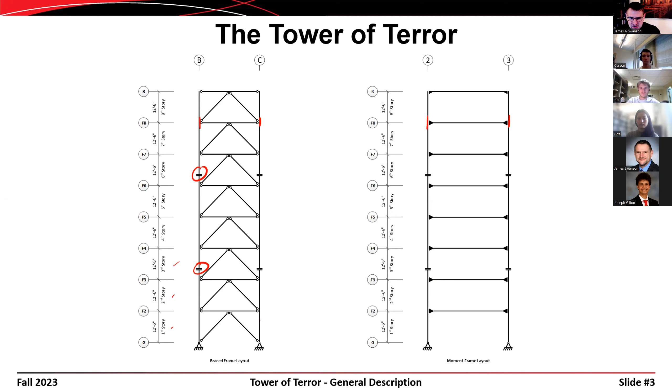All right, so I'm going to look at the lateral framing systems. I'm going to look at the brace frames first, and then I'm going to go back and look at the moment resisting frames. So when you get into a system like this, where it has a lot of members, one of the first things that you want to do is come up with a naming scheme so that when you export the results, the results make sense. If you just leave the default naming, then you'll probably spend hours chasing back the results to figure out which particular member they apply to. So that's one of the first things that I want to define here.

That's one of the things that I learned by trial and error, right? I mean, you learn to walk by falling down a bunch of times. And when I was getting good at this, which, forgive me, presumes that I am good at it, one of the mistakes I made was I didn't come up with that naming scheme right off.

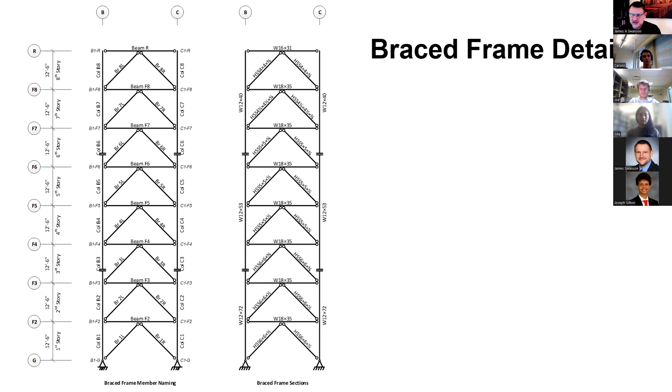And then here are the sections that I'm using. So I went through and did a preliminary design of this frame and came up with these sections, and they should be close to being adequate. I'm not guaranteeing that they're all good, but they aren't going to be absurdly overloaded or absurdly over-designed.

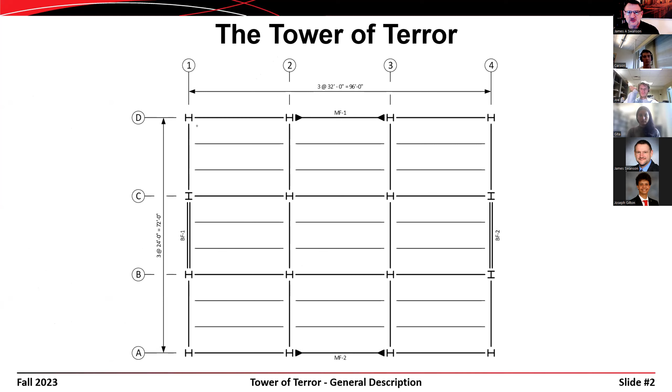Right. So here is my determination of load. And this is one of the more challenging aspects of modeling a 3-dimensional structure in 2 dimensions, right? So ultimately what we're doing is this. We're taking this structure that's 3 dimensions, and we're going to construct 2-dimensional models in order to do the lateral framing. So we're going to come up with one 2-dimensional model of this brace frame here in framing line 1.

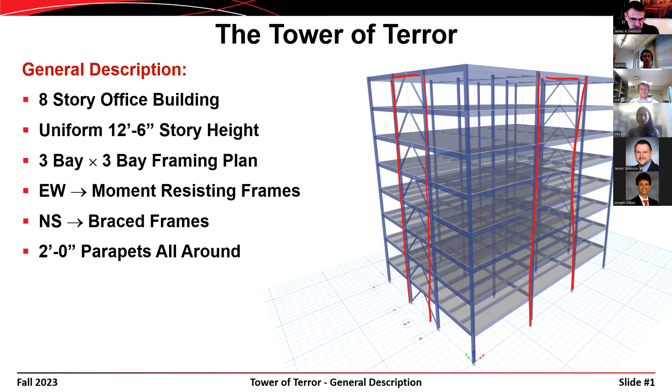And then we're going to do one 2-dimensional model of this moment frame here. And the idea is that we use that to design the lateral force resisting systems, and then the gravity system could be designed by hand. Certainly it could be designed by the computer as well. But one of the more tedious operations is figuring out what the loads are that go on the lateral framing. So I'm going to use a tributary area approach here to determine these gravity load takeoffs, if you will.

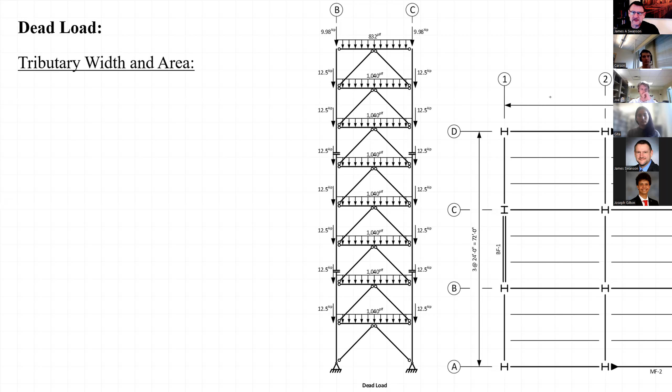And so Maggie has a different word for it that she coined, and I like it, but I can't remember what it is now. I'll have to ask her what it is, or more likely I'll remember in about 90 seconds, and then I'll interrupt class again and tell you what it is.

Anyways, so we have dead load, and for the roof and each floor level, the tributary width for the beams is going to look like that. So I have a tributary width that is 16 feet. And then I have a tributary area that will also feed into the columns that looks like that. So I have a tributary width and a tributary area, W sub T and A sub T.

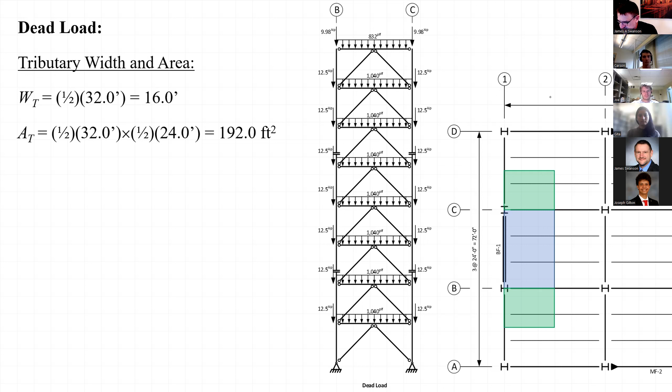And so the way that this works is that, let me see if I can coordinate colors here. The blue tributary area ends up leading to this distributed load that's on each one of those beams. And then that green tributary area ends up contributing to these point loads that are here. And I'm calling them beams, but they're really girders because they are flexural members that support other flexural members. So those are actually girders, but I'll just call them beams for the sake of simplicity.

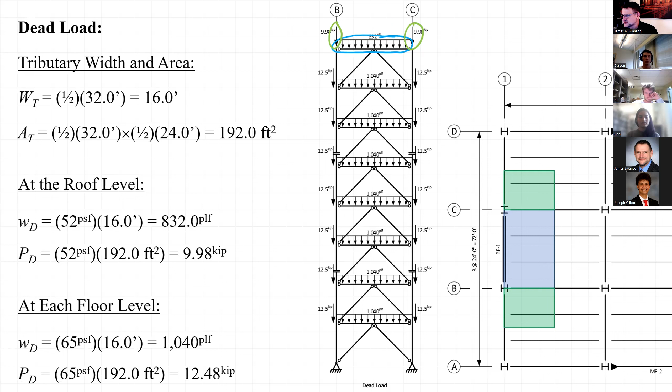Right. And so what we can do is take our distributed loads, 52 pounds per square foot at the roof level, multiplied by the tributary width. I get 832 pounds per linear foot. I can take the 52 pounds per square foot times the tributary area, I get 9.98 kips. And then at each floor level, we can do the same thing. And there you can see the distributed loads and the point loads.

And so the load path that's following here is that all the load that's in this blue area is traveling directly over to the supporting girder there. Or alternatively, and probably more correctly, these loads are coming into this beam here, and then that beam has a reaction at the girder, and you could model it as a pair of point loads instead. So that's also acceptable.

Possibly a little bit more accurate, but the level of accuracy you get out of that extra calculation really isn't justified. There's some exercises that you have done or you will do in steel design, for example, that shows that it doesn't really matter whether you model a girder subjected to a series of point loads or subjected to a uniform load. It basically ends up being the same answer.

So then over here, those loads end up going out to this edge girder, and then they go here and then into a point load that is applied to that column. And since I'm not modeling this girder here, I'm going to have to model the loads that are transferred into the column from that member instead. And that's where that 9.98 kips or 12.5 kips come from.

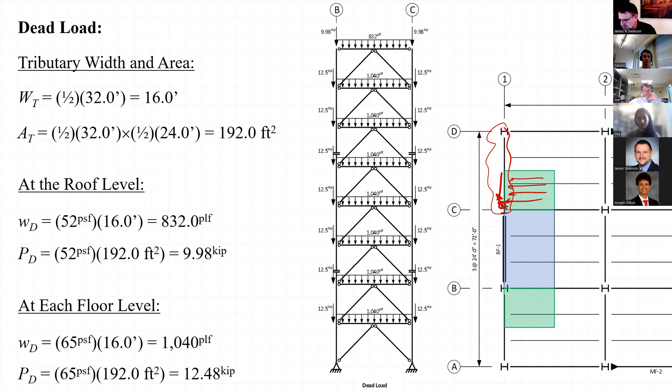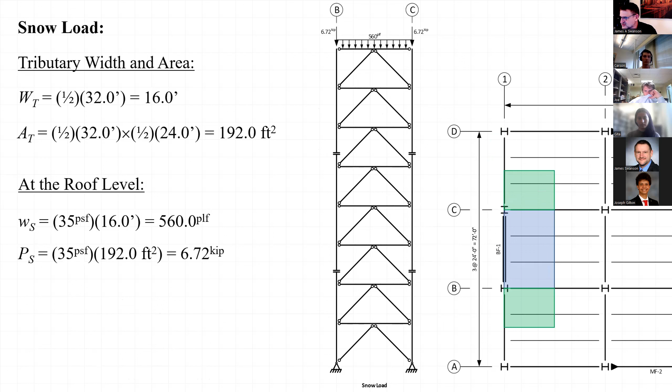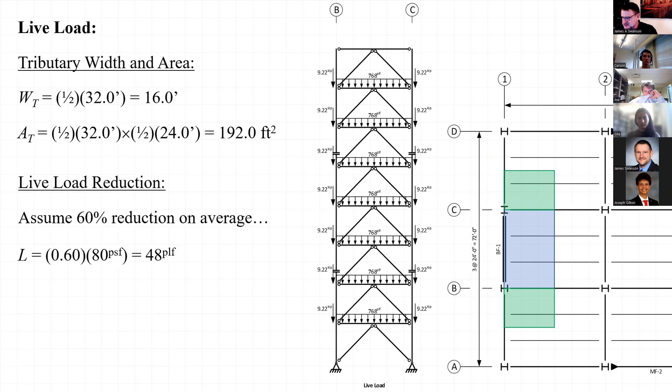All right, so with that explanation, the next step is to look at the snow load at the roof level. Similar process, except that we just have smaller loads, a distributed load of 560 pounds per linear foot and point loads of 6.72 kips. And then we can do the live load at each of the floor levels. So here's my tributary width again, my tributary area, that remains unchanged. And then if I assume a 60% reduction on average, that takes the 80 pounds per square foot to 48 pounds per, there's a units issue there.

It's funny, I've been giving this presentation for a couple of years and I still find mistakes in it.

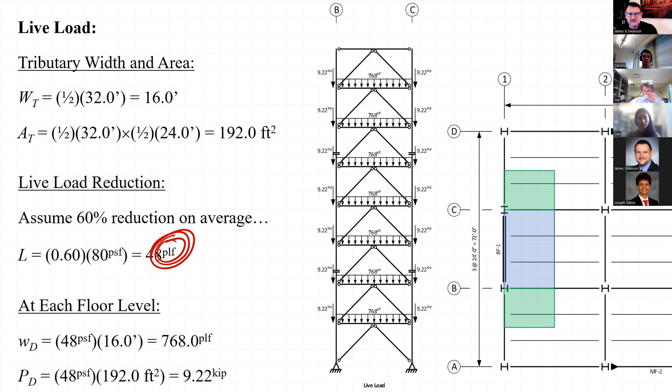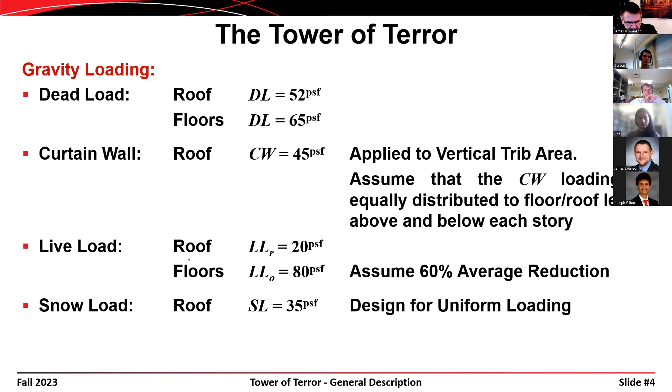And so then I take that 48 pounds per square foot, gives me 768 pounds per linear foot on each beam, and then 9.22 kips at each column level. All right. So then the next step is to look at the curtain wall loading. Let me go back to my slide where I dictate the loads. The curtain wall has a load of 45 pounds per square foot that's applied to a vertical tributary area. And so we assume that that loading is equally distributed to the floor or roof levels above and below each story.

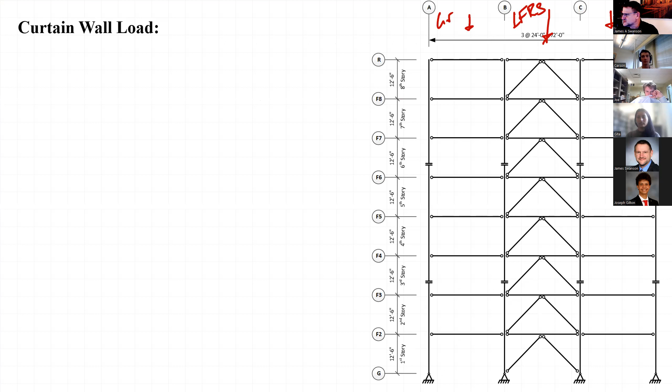So now I'm going to look at an elevation view of the frame that is in framing line number 1, including the gravity framing. So there's an opportunity to illustrate. This is the lateral force resisting system here. And this frame right here is just to carry gravity loads, and this frame right there is just to carry gravity loads. So that's what I mean when I say gravity framing versus lateral framing or lateral force resisting systems.

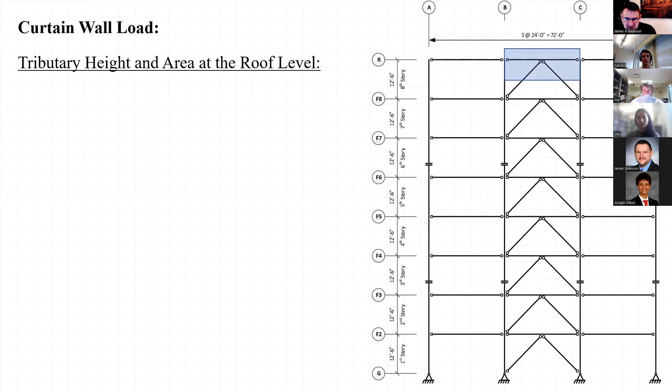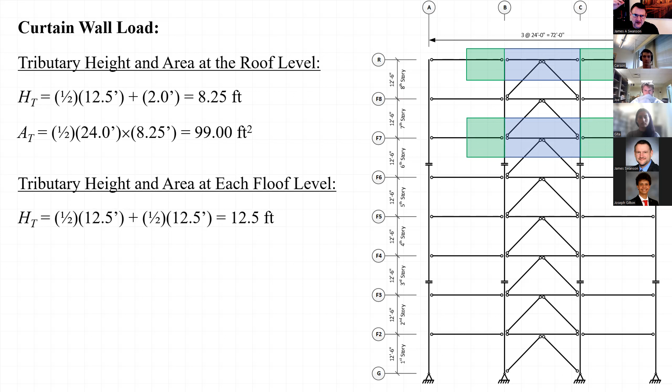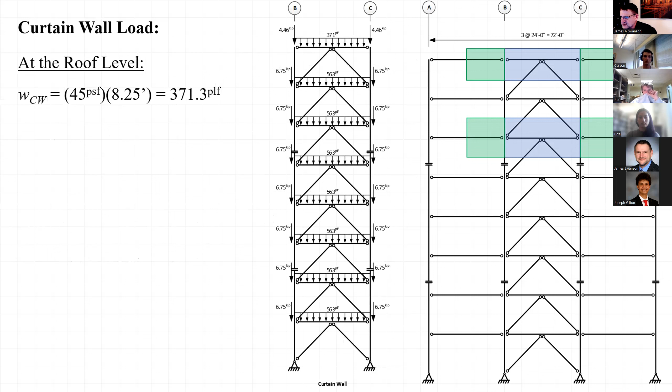And so we can do the same thing for the tributary height and the tributary area at each floor level. A little bit different because the roof has a 2-foot parapet above it instead of half of a 12-foot 6-inch story above it. And so we can calculate those heights and those tributary areas. When we calculate our loads, we end up with 371 pounds per linear foot on the beam at the roof level, 4.46 kips at the columns at the roof level. And then at each floor level, we end up with 563 and 6.75 respectively.

All right, so this is a summary of the gravity loads that I have on those braced frames, right? So I have dead load on the left, I have the curtain wall load next to that. To the right of center, I have the snow load at the roof level, and then all the way to the right, I have the live loads. So the curtain wall load is technically a dead load. So when we apply our load combinations and our load factors, I'll use the same factor on the curtain wall load that I do on the dead load.

I usually tabulate them separately though. I keep track of them separately. That way, when I find a mistake and I need to go back and chase that through my numbers, it's easier to do that when I have the curtain wall load calculated separately from the dead loads that are applied or part of the roof and the floor slabs.

Excuse me. I've done this a number of times with a number of different buildings. Every couple of years we change the capstone project, right? And so I have to do this all over again. And I never get it right the first time. It's tedious. I'm anal retentive, but even with that, I still screw it up every time.

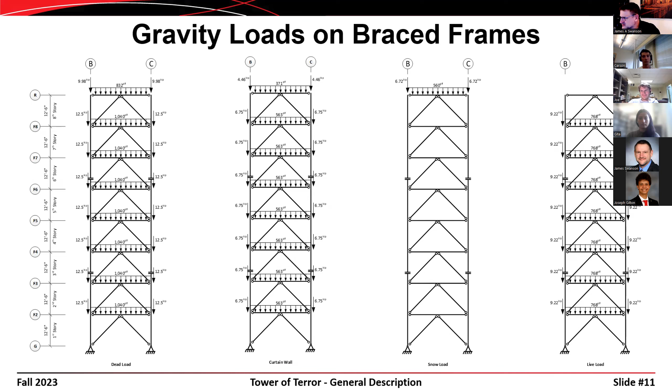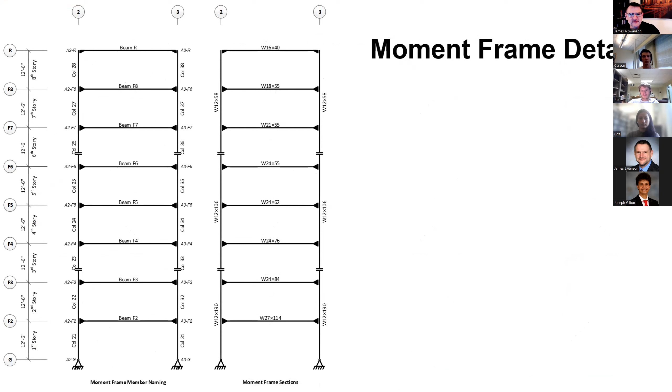Anyways, right. So there's the loads that we're going to put on. Gravity loads. We still need lateral loads, but I'll come back and hit that at the end. So here's the moment resisting frames. Same idea that we did with the brace frames, except now we have fewer members. And so if we go through and do our gravity load takeoffs, in this case, when we look at the tributary width, it's much smaller because the beams that are part of the moment resisting frame are parallel to the floor joists or to the filler beams in the structure. So the tributary width is only 4 feet on those members.

Then if we look at the tributary area that manifests as a point load in the columns, that has a goofy shape in this case. Let me go ahead and show you what that area is. It's 320 square foot per column. And the reason that is a strange shape is because any load that's acting to the left of center of that girder is going to come over and act as a point load there, plus the reaction force that comes from everything on that half of that beam. So all of this load ends up making its way either directly or indirectly into that column. And so that's why it's a goofy shape. I guess that's all I had to say about that.

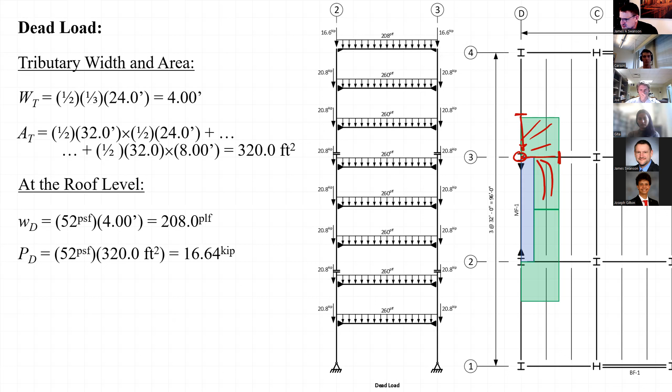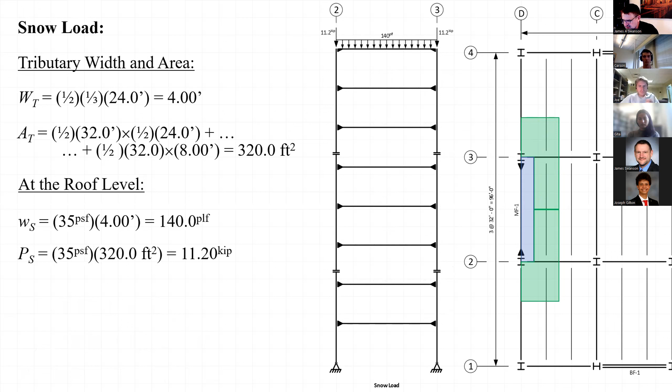So if we look at the roof level, we have a dead load of 52 pounds per square foot that ends up as 208 pounds per linear foot on the beam, or 16.6 kips at each column. And then at each floor level, it works out to be 260 and 20.8 instead. Use the same approach for the snow load at the roof level. We get 140 pounds per linear foot, or 11.2 kips. We can look at the live load at each floor level. Again, similar, 192 pounds per linear foot, or 15.4 kips at each column location.

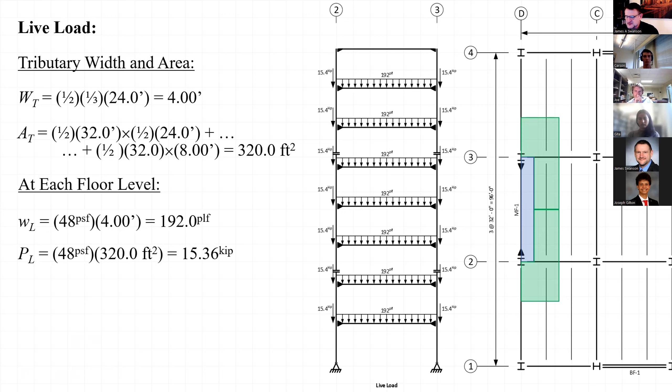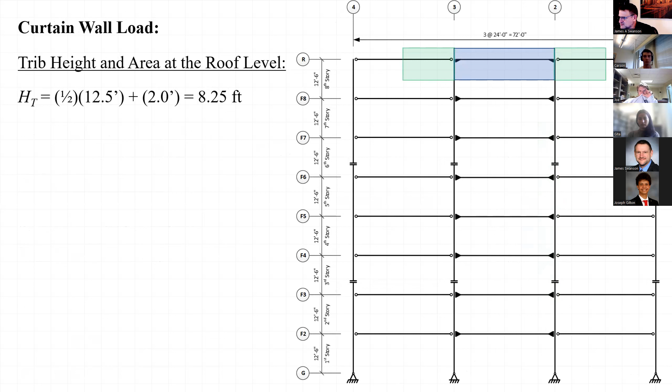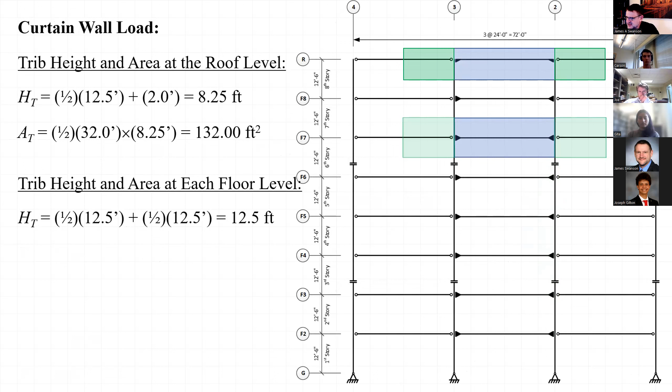And then the curtain wall loading. This is remarkably analogous to what we did with the braced frame just a moment ago. So the blue tributary area, these are vertical areas. The blue tributary area ends up being a distributed load on the beam, and the green tributary area ends up being a point load at the column locations. Different tributary heights at the floor levels relative to the roof level. And so with the curtain wall loading, we end up with these loads. All right, so there are the loads that are on our moment resisting frames, the gravity loads.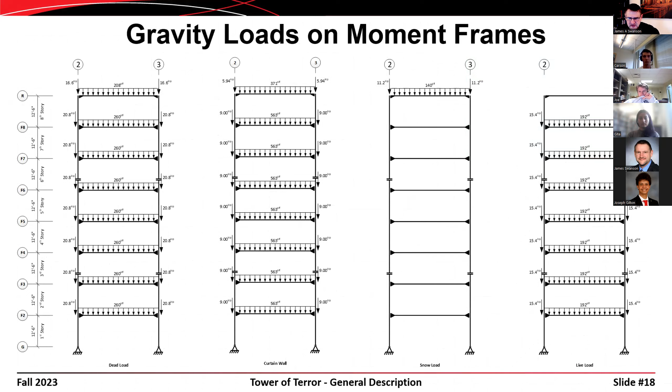Now for the wind load, if you guys aren't familiar with ASCE 7, then this is going to be foreign to you. But even if that is the case, really all we need are the loads that are coming up a few slides from now. That's all we need for this class. If you're interested in learning more about this, then take loads and systems. It's currently an undergraduate level class, but there's talk of making it a dual level class sometime in the future. I'm not sure when. That's administrative.

Anyways, we're basing our wind loads on a base wind velocity of 115 miles an hour. I've assumed exposure B. We have a directionality factor of 0.85, an elevation factor of 1.0, gust factor of 0.85. The premise is that this building is designed in the Cincinnati area. Cincinnati has an elevation above sea level of around 800 feet, depending on where you're at. So we could take an elevation factor reduction of like 4%, but it's just not worth my time to calculate that. I should also mention that these are based on the ASCE 7-16 criteria, and it is a little bit different in ASCE 7-22. Not enough to really influence anything we're doing in this class, but in case you start chasing numbers, that might make a difference for you.

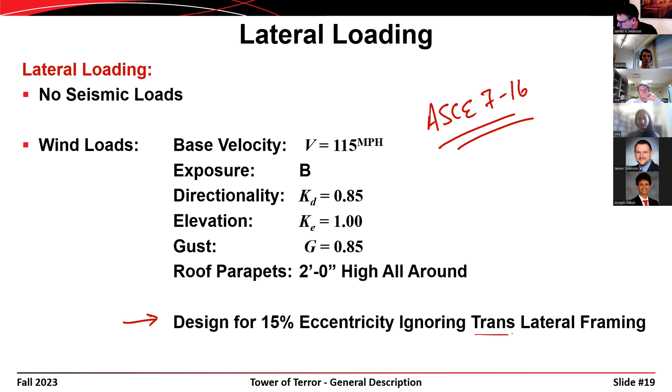One other thing: for a cookie cutter building like this one that's rectangular in plan, you don't have to consider eccentricity of the wind load acting on the structure. But I decided to do so anyways to make this problem a little bit more interesting. So I'm assuming that we have 15% eccentricity in the application of the wind load, ignoring the stiffness of the transverse lateral framing. I should wonder about including that word in my lectures nowadays. Right, so here's the spreadsheet that I use to calculate wind loads.

After you come up with the velocity pressures, the Q sub Z terms, everything else is really easy to do in a spreadsheet. That's the way I usually approach these after getting through the first couple of examples in the loads and systems class.

In the east-west direction, these are the moment resisting frames. In the north-south direction, these are the braced frames. So you have a force on the windward wall, a force on the leeward wall, and then the net, the combination of the two.

At the roof level for the entire structure, I have 23.7 kips blowing in either the east or west direction. If you add up those wind loads over the height of the structure, the total base shear in the east-west direction is 196.7 kips.

Similarly, in the north-south direction, I have a force on the windward wall, a force on the leeward wall, and a force at the roof level of 32.6 kips for the entire structure. That gives me a base shear of 277.8 kips.

Note that the parapet loads are handled a little bit oddly. Those of you who had loads and systems should be familiar with this, but those parapet loads are translated down and applied at the roof level.

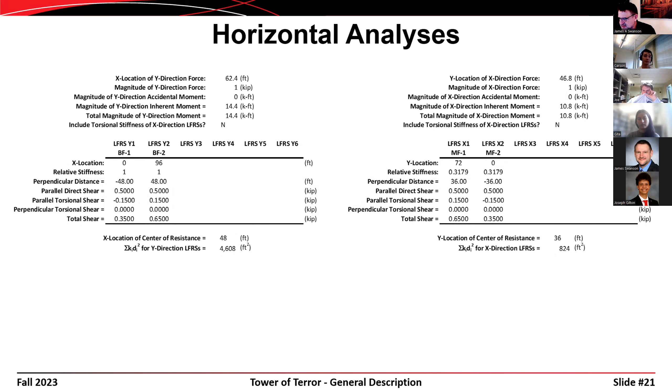The next step is to do a horizontal analysis to figure out how much each one of the lateral frames carries. The takeaway is that for the braced frames in the north-south direction, each one carries 65% of the total applied load in that direction. For the moment resisting frames in the east-west direction, each one carries 65% of the total applied lateral load in the east-west direction.

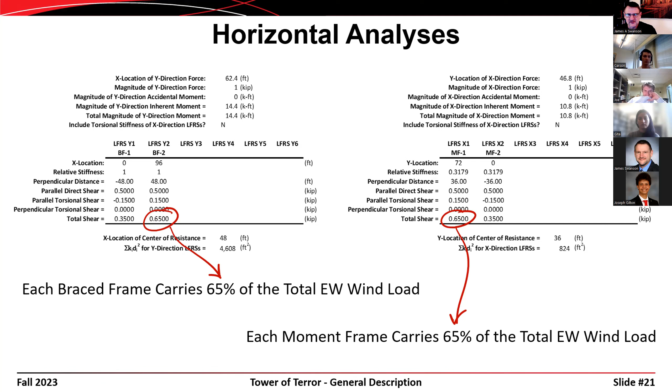Again, this is just one slide covering something I spend a week on in structural loads and systems—how to do the horizontal analysis. Not something I can spend a lot of time on here, but in short, this takes the center of rigidity of the structure, which is somewhere between the two moment resisting frames and between the two brace frames.

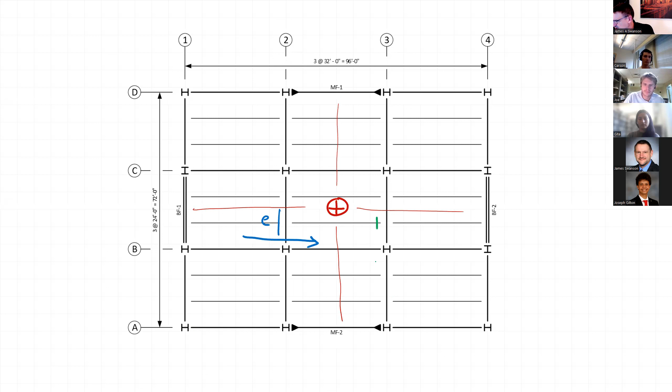This accounts for the prescription that our east-west wind load is applied with some eccentricity, or that our north-south wind load—I'll draw that in green instead—is applied also with some eccentricity. The idea is that when we take loads applied eccentrically and apply them concentrically to the center of rigidity, they come along with some force and some torsional moment.

In this case, that force is translated out to this frame and to this frame, and that moment is translated outward like this—applied in this direction on that frame, and in that direction on that frame. So you end up with one of the two frames carrying more than its fair share of load because of the eccentricity, because of the in-plane torsional moment that exists.

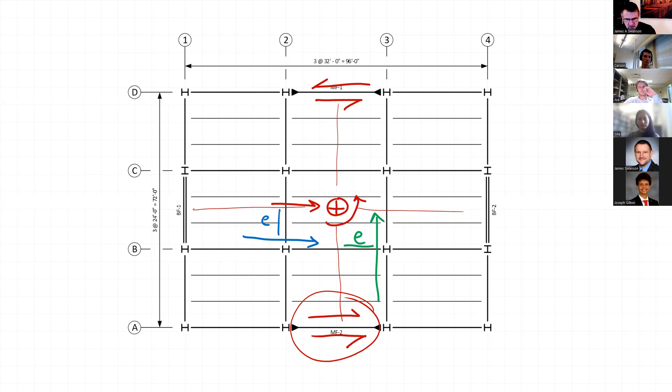So the takeaway is that if we go back a couple of slides, what I'm going to end up doing is multiplying these values. Let me go to a different color. I'm going to multiply this guy here by 65%—so I have 23.7 kips at the roof level multiplied by 0.65.

Let me get my calculator real quick. That gives me 15.4 kips. Now I'll take this guy here, 32.6 kips, which is also 65% for the brace frames. 32.6 times 0.65 gives me 21.2 kips.

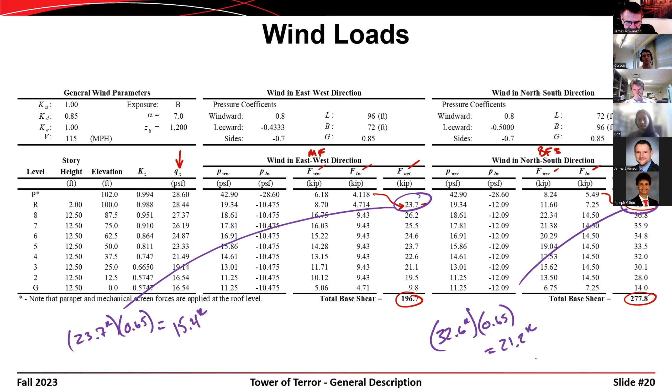So when we go ahead a couple of slides and look at the loads, I have 21.2 kips for my lateral load at the roof level on the brace frames, and then 15.4 kips here.

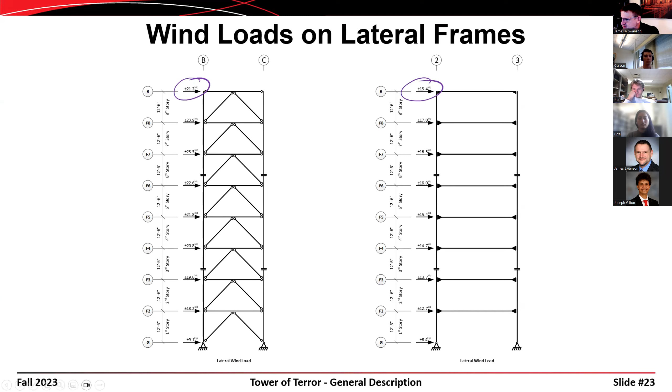All right, so now I'm going to jump over to the other computer and start working in SAP 2000. I have models of this in Visual Analysis as well, but I'm not going to do it in Visual Analysis in class—I'll stick to SAP 2000 for this, and then we'll move on and model it in ETABS as well.

Visual Analysis was nice for me because it does a pretty good job of doing design checks, and it's easier to interpret than SAP 2000 for small structures like this, which is why I used it. But I'm not going to require you guys to do that. Anyways, let's see—I've got SAP running over here.

Let's see, I need to share my screen. Screen 3. All right, so here's SAP 2000, and what I wanted to also do was bring up that same PowerPoint presentation so I could Alt-Tab between. I need to save it over here, otherwise I'll get a conflicted copy with the two computers. Now I need to wait for Dropbox to upload it. Now I need to wait for Dropbox to download it.

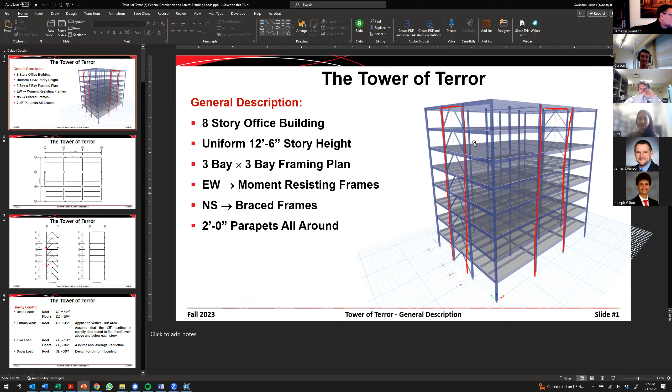Anyways, right. So here's our building. So what I'm going to do is go to this slide here and use this for the geometry. I'm going to model the brace frame first. It's a little bit more interesting. So the brace frame has a bay width of 24 feet, and then it has story heights, right? So that's what I'm going to go for. So the first step is to come up with a grid. So I'm going to define this as a grid only, and then I'm going to customize that grid.

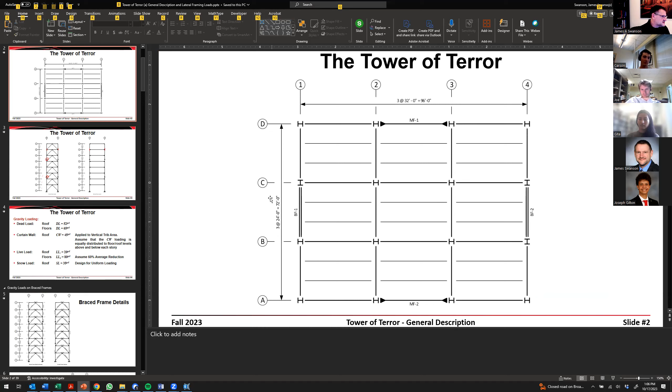So in the X direction, let me see if I'm going to model this the right way. It's actually going to be in the YZ plane. So I can do that. Let me specify these in the YZ plane. So in the Y direction, I've got 1, 2, 3, 4 grid lines. In the X direction, it doesn't matter. I just need 1. And then in the Z direction on the next slide, come on, next slide, please. I need 1, 2, 3, 4, 5, 6, 7, 8, 9 grid lines.

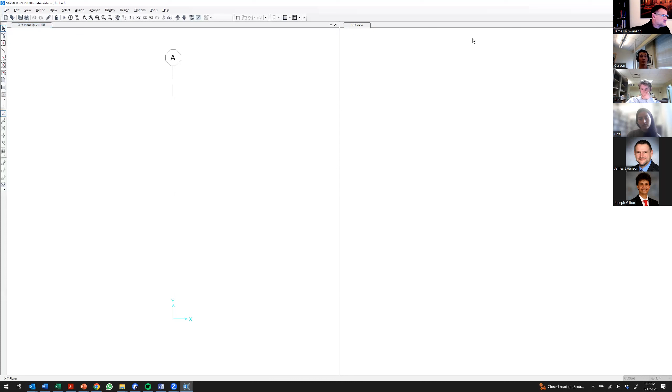So let me go here. So in the X direction, I just need 1, I need 4, and then 9. The X direction spacing doesn't matter. The Y direction spacing is 24 feet. The Z direction spacing is 12.5 feet. And my first grid line is at 0, 0, 0. Okay, and that should, I think, give me what I need. So let me keep this as a 3D view on the right. On the left, I'm going to go to the YZ plane. There we go. Is that right? Well, it didn't label the framing line right.

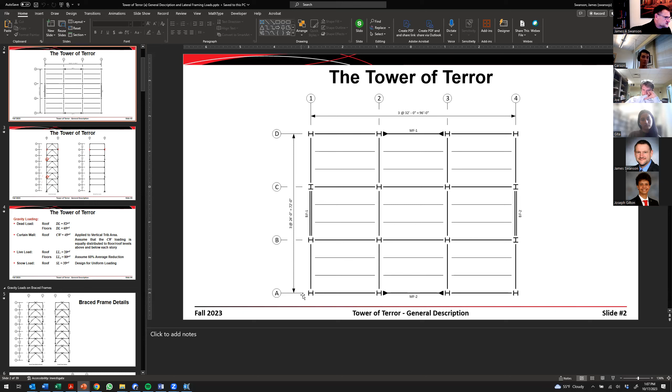So I can go in and edit the grid, modify show systems. So the grid ID in the X direction is going to be ID number 1. And then here, at 0 is going to be A, at 24 is B, C, and D. So my origin is down here at grid line A1. So this is going to be A, that's going to be B, C, and D, like that. Okay, I want this to be the ground floor. I want that to be F2, F3, F4, F5, F6, F7, and I screwed up something.

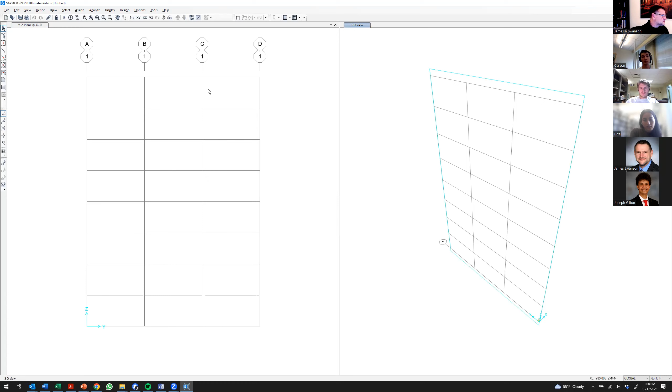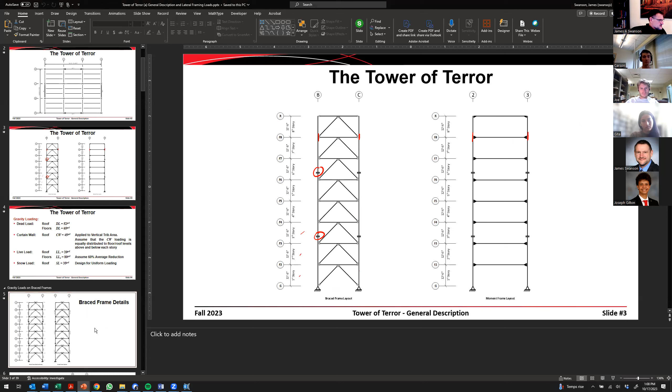F8, I did not screw up something. F8, whoops, that's 9, and then R. All right, so hit OK again, and there we go. Great. So the only thing it's missing, for some reason, it's not showing the elevations, but I'm going to run with that and call it OK. All right, so what I'm going to do is define my cross sections. And that's important because it's easier to define them up front. So I need a 12x72, a 12x53, and a 12x40 to start off with.

So let's define section properties, frame sections, import, W shape. It's going to open up this library. I'll use the 15th edition of the manual. Okay, so I need W12x72. What were the other ones? W12x72, 53, and 40. Okay, what do I need for beams? 18x35 all the way up to the roof, and then 16x31. There's the 16x31, and there's the 18x35. Hit OK, hit OK, and OK.

All right, so now what I'm going to do is draw in my columns. So the columns at the base level are a W12x72. I always start at the bottom and draw upwards with my columns. I'm only going to draw the first story columns.

I must have hit the wrong button. There we go. Now I'll draw the column here, 12x72. The framing is continuous because the columns are continuous with each other.

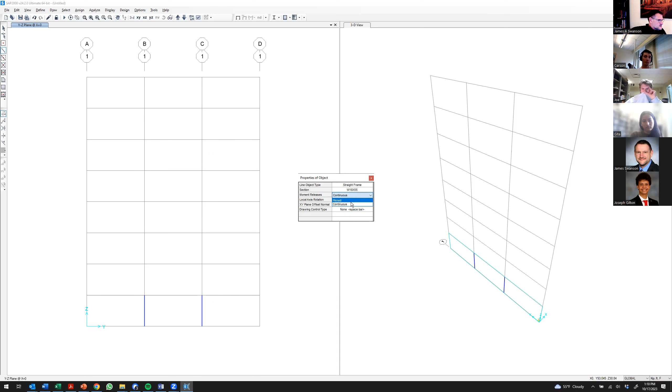Now I'm going to draw that beam in. The beam across the top is an 18 by 55. This framing is going to be pinned because the beam is pinned to each one of the columns. Then I can go in and show the releases just to make sure I have everything defined the way I want. There we go.

Now I need the braces. The braces at the ground level are HSS 6x6 half. So I'll go back in and define my sections, frame sections, import property, a tube. And I need 6x6 by half at the lower level.

These are tedious. I always wish they had done this better because they have them sorted by section size, but the way they have it, a 3/16 is bigger than a half because a 3 is bigger than a 1 in that fraction. I always thought, well gee, you guys could do better. And they just don't. So here's a 6x6 by half.

What else do I need? I need a 6x6 3/8, a 5x5 half. Let's see, 6x6 3/8, 5 by 5 by half. There we go.

What else do I need? I need a 5x5 3/8, a 4.5x4.5 3/8. Okay, then we go up here, the 4.5x4.5 3/8. So the 4.5s are actually smaller than the 4s on this. And then I need, yeah, that's it. That should do us fine.

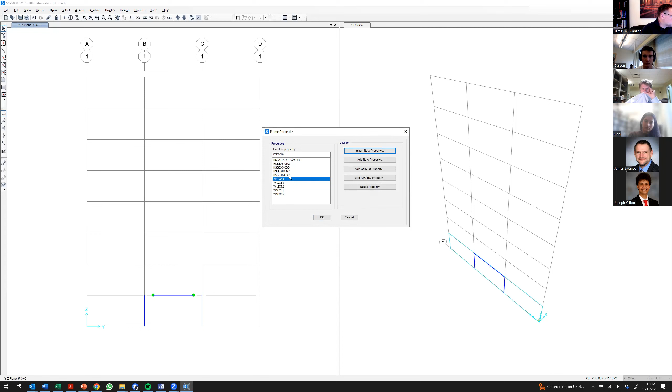Hit OK. All right, and so 6 by 6 by half at the ground level. So let me go ahead and put these in. So this is going to be a bit of a problem because I need to frame these in at the mid-length of that beam, and I don't have a framing line there.

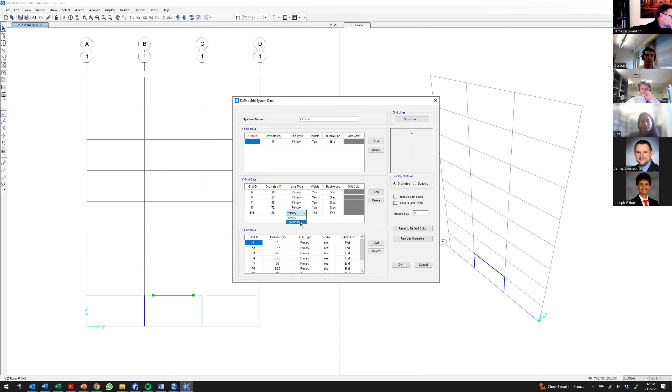What I could do is put one in. Let's do that, I think that's probably the best way of doing this. Let me go and edit my grid data, modify. I'm going to add a grid line, B.5, at 36 feet. Line type secondary, and the bubble location we'll put at the start. Yeah, it showed up. Okay, good.

All right, so now I can come in and draw those braces. And just like I do with the columns, I'm going to start at the lower end and go to the upper end in all cases.

Okay, so let me go back to my display options, show the sections, make sure I have those defined the way that I want. Okay, now a couple other things.

What I'm going to do is copy this vertically. When I do that, it makes a lot of sense to have the parameters defined before I copy. So I want to set the beam so it's automatically meshing, set the output stations the way that I want, and that sort of thing. In fact, if I wasn't pressed for time, I would go through and define the loads on this as well, but I am kind of pressed for time, so I won't do that today.

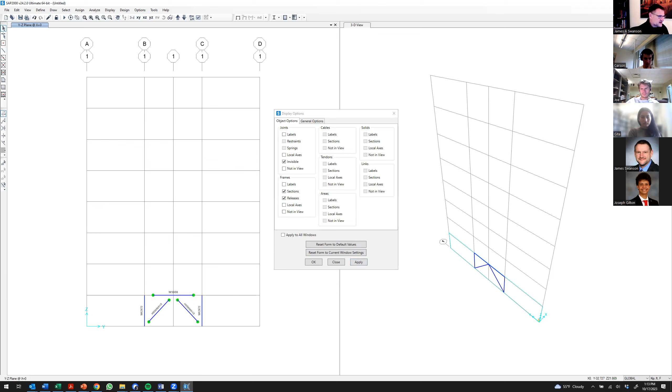Let me zoom in a little bit down there. It's not quite what I wanted. Let me see if I can hit that button instead. Yeah, it's zooming in on the...

All right, so let me go in here and select that beam. I'm going to go to assign frame, and then to automatic frame mesh. I want to mesh at intermediate joints, otherwise it's not going to connect these two braces to that beam. If I want these two braces to connect to that beam, I have to automatically put a node in there. So I need it to auto mesh at intermediate joints.

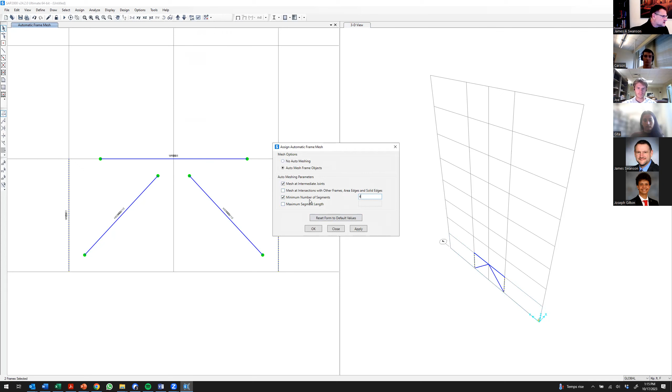I might have chosen this differently the last time I did it. For these columns, I'm okay with that. And that one, I'll do the same thing there. The columns, I don't need to break those up as much because they don't have any intermediate transverse loadings. There's lateral loads, but they're all applied at the floor levels. I don't need the intermediate joints, but that won't hurt me either. So we'll go like that and then hit OK.

All right, and so now what I'm going to do is copy that vertically.

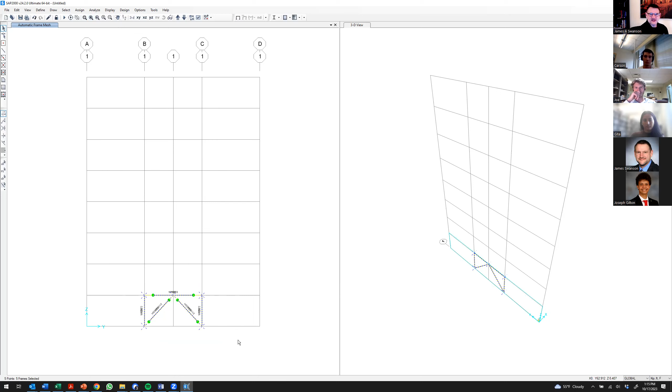You go up here, I think it's F3. Yep, zoom extents. Let me drag a window, and I want to copy that upwards. In order to do that, it's actually a replicate command in SAP 2000. So we're going to go up here to draw, and then maybe it's under edit. We're going to go to edit, and then replicate. I usually hit Control R.

So I'm going to go in increments in the Z direction, and it's going to be 12.5-foot increments. I want to have 1, 2, 3, 4, 5, 6, 7 copies. And so that's going to basically copy that upwards.

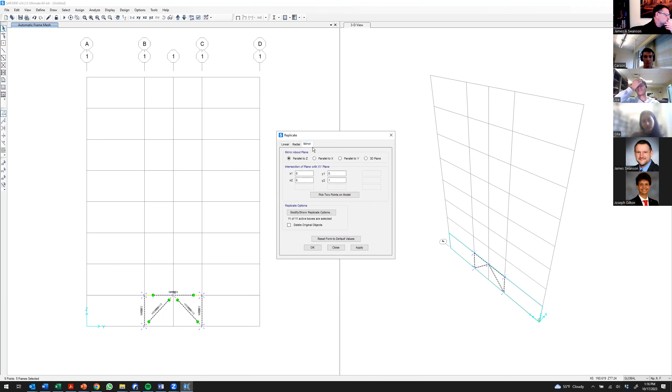And then, there's a lot of other things you can do. You can do this in a radial way, or using a mirror if you want. And then you can go here and open this options dialog box, and choose to include or exclude things like releases, local axes, cardinal points, skews, output stations, loads, all kinds of stuff. So if you want to copy some stuff but not other stuff, it's all in here.

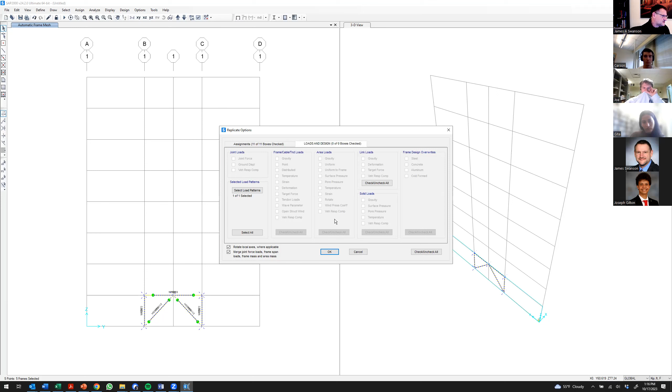And so here's the loads. I don't have any loads defined yet, so it's all grayed out, but I'm going to leave that as default. I'm going to go ahead and hit apply, and there's my structure.

All right, so it doesn't look too bad. Let me go here to display, and there's a way of refreshing this. Right now I've got more than one thing displayed on here. I've got my automatic meshing displayed as well. So there's a refresh button.

Sections, releases. That didn't work. Where is it? Well, I'm not going to take the time. There was a way of refreshing the display because you get artifacts like that.

Let me try this. I'll get rid of the sections and the releases. Hit apply. There, I've got it.

I can go in here. Let's show the analytical model. It has to create the analytical model. And now if we go back and look, the nodes are currently invisible. Let's make them visible. See, it put all those extra nodes in the beams. It put the extra nodes in the columns. And now the braces are supposedly connected to the beam.

All right, let me go back here. I don't want the analysis model visible anymore. I do want sections though. Let's keep those nodes invisible for the time being. And it still has the S in there.

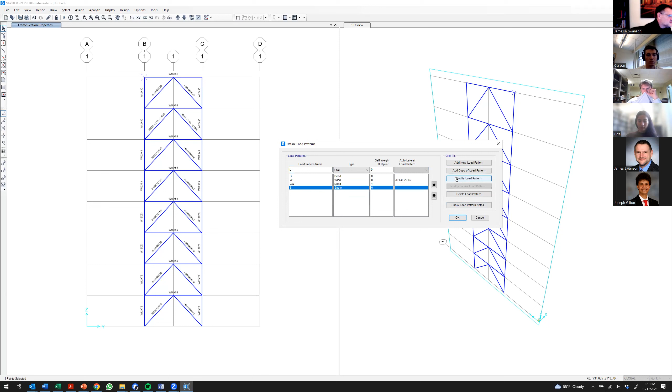All right, like that. So now what I'll do is I'll come in and assign joint loads, forces. And so I want to assign the wind loads. I'm in the YZ plane, so these are going to be in the positive Y direction. Let's see, this is framing line A. So if I want them to point to the right, it's got to be a negative. No, it's got to be a positive number. Okay. So what are the magnitudes that I need here?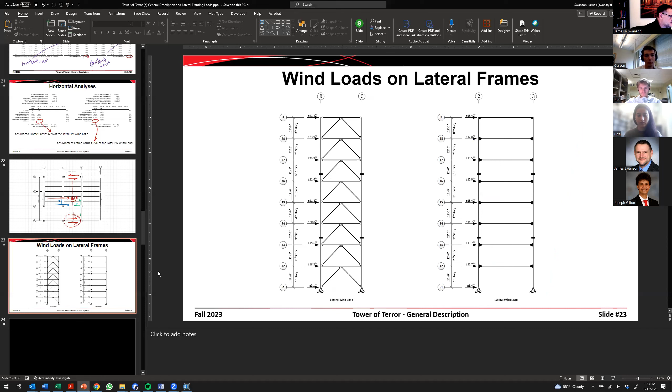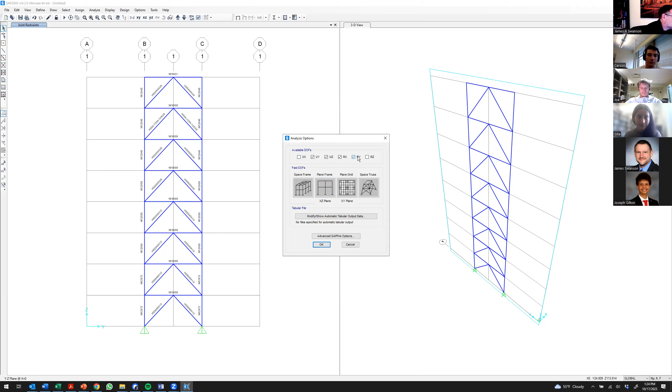Okay, I need to restrain the nodes at the base. So I'll go to assign joint restraints. I'll call them pinned like that. I need to set my analysis options so that I model it as a 2D frame. Got to be careful here because if I just select a plane frame, it assumes that the frame is in the XZ plane, and that's not what I want. So I want displacements in the Y direction, displacements in the Z direction, and rotations about the X axis. So that is the plane frame definition that I want.

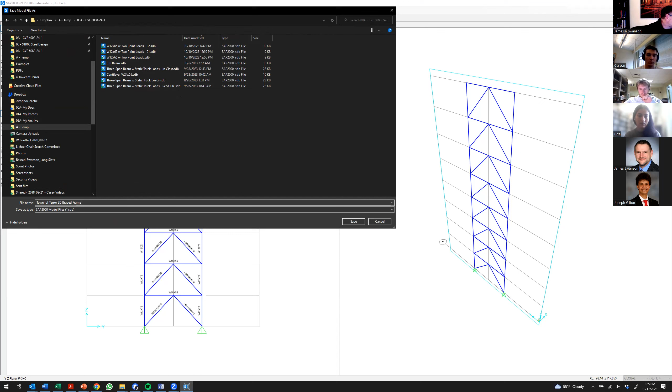Okay, and so let me go ahead and save this as something. I'll go to my temp directory that I've been using for this class. I'll call it Tower of Terror 2D Braced Frame. And I'll just give it a version number just in case I modify something. Okay, let me go in and do my analysis now.

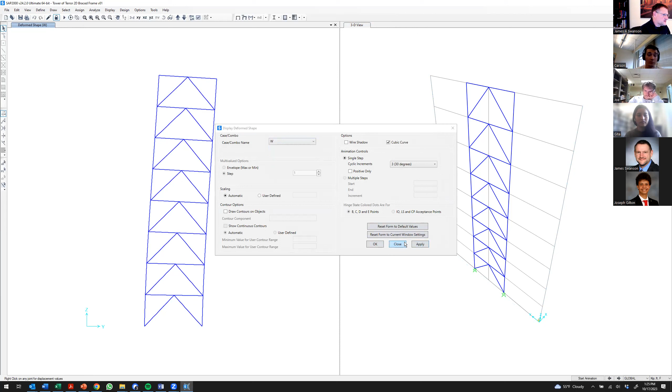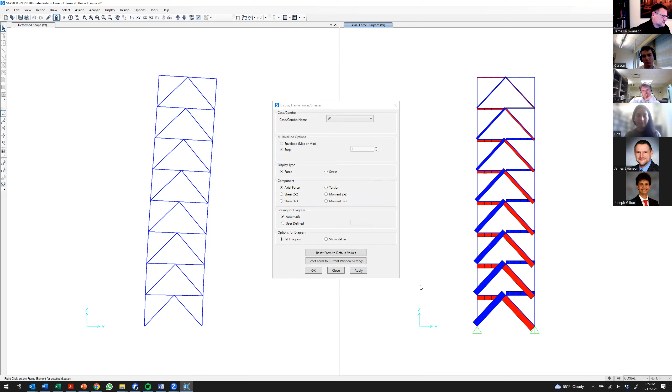Okay, so there's my deformed shape under dead load. Let me go ahead and plot the deformed shape here under wind load. I didn't put any dead loads in, so it makes sense. All right, so it's moving the way that I expect. In this right view, I'll set that up in the YZ plane as well and draw diagrams there. Since we only have wind load, I'll draw a wind load diagram. I'll use axial force because it's a brace frame, so it's going to be dominated by the axial stiffness. So you can see the impact of those loads: tension in the braces on the left side and compression in the braces on the right side.

So let me do this. I'm going to go over here and show the nodes again in that model. And what I want to show is this. Let me change the units to inches. So if we look at the roof drift at this node here, we have a drift in the Y direction of 2.4355 inches. If we go over to this node, we end up with a drift of 2.424 inches.

So in a real building, if there were a drift, we would expect those two nodes to have the same amount of horizontal displacement, but they don't. And the reason why is because that beam at the roof level actually shrinks in length a little bit under the compressive load that it carries. See how it's carrying compression here and a little bit of tension there? So that beam actually changes length.

So we have a couple of different options to make this model more reflective of what we expect in reality. We would expect those two nodes to displace by the same amount because there would be a concrete floor slab or roof slab with a very high stiffness in plane. So one approach is to select all of these beam members and specify a property modifier for the axial of 999. So I can go in, assign frame property modifiers, and for the cross-sectional area, specify a property modifier like that. And then

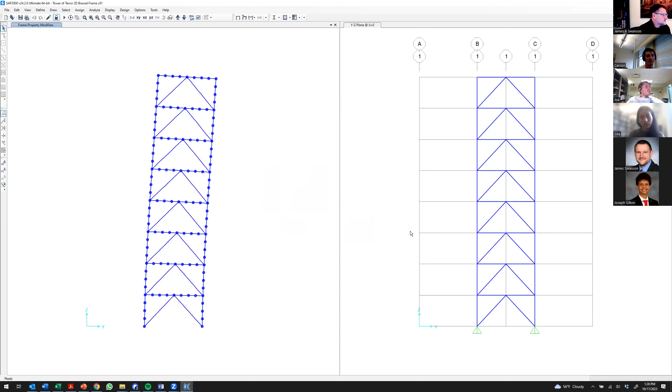Okay, now we look at the displacements over here on the left. On the left side of the frame, we end up with a displacement. Come on now. Thank you. 2.3051 inches, and over here, 2.3051 inches.

So that accomplished what we wanted, but it's not as sophisticated as we could have. It works, and the results that we would get out of it would be okay, but I'm going to show you a different way. Let me go through first and remove those. So I'm going to go in those property modifiers and I'm going to specify 1 for everything. So that gets rid of the property modifiers that I just defined.

What I'm going to do instead is I'm going to define something called a constraint. I'm going to go in and define a joint constraint. And what I'm going to do is use a diaphragm constraint that's going to tell SAP 2000 that, hey, this is a building that I'm modeling. The real building has diaphragms in it that keep the horizontal displacements at each one of those nodes equal to each other at every Z elevation.

So I'm going to add that new diaphragm constraint like this. The constraint axis is going to be the Z axis, and that's an axis that's normal to the plane of the diaphragms that I'm defining. So the diaphragms are basically the floor slabs and the roof diaphragm in the structure. The normal to those diaphragms is going to be the Z axis. And I'm going to check this box down here at the bottom that says I want a different diaphragm constraint at every elevation in the structure.

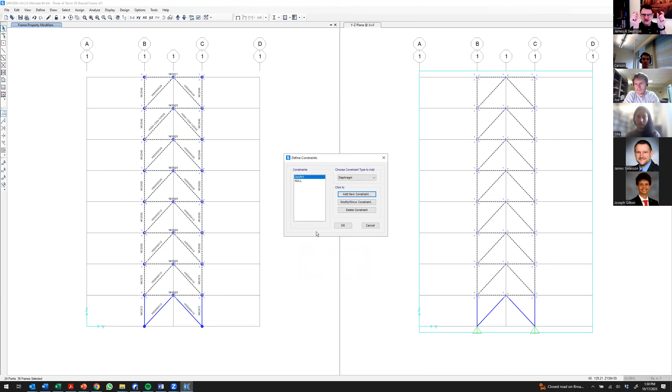So let's go ahead. I'll just leave the constraint name as its default. And I'm going to go ahead like that. And then I'm going to hit OK here. And so what it's doing is for each one of these nodes that's selected, it's going to go figure out what the Z coordinate is. And for every group of nodes that is at the same value of Z, it's going to assign a constraint that says that every time one node moves by a certain amount, the other node has to move by the same amount. And so we hit OK like that, and we give it a minute to think.

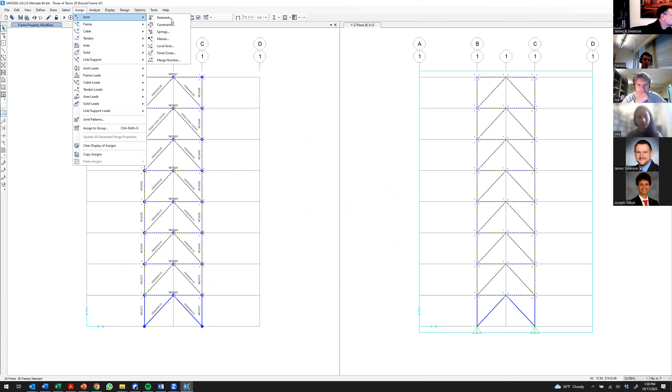I hope this works. I don't always get this right the first time either. All right, and so let me, oops, that's not what I wanted. I wanted the escape button, there we go. If I go in and right click on that node, it brings up this modifier and it says constraints none. All right, that's not what I wanted. So let me select those nodes again. Let me go to assign joint constraints, and I'm going to assign the constraint to those nodes. Hit OK. And so now I can go in, right click on those.

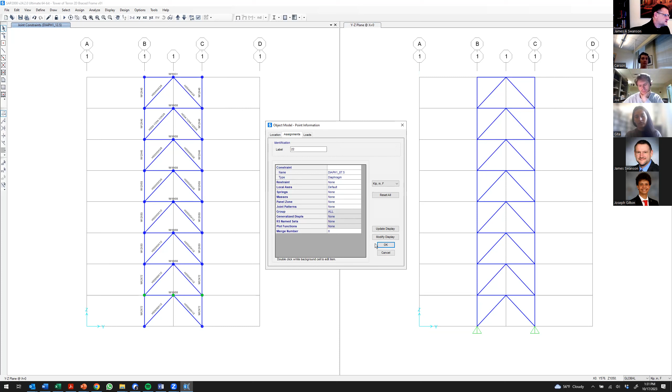And so I have a diaphragm 100. And so that's the constraint that node participates in. Let me go here. This is going to be diaphragm constraint 87.5. So the 100, the 87.5, that's the Z elevation of those nodes in the units of feet. So let me go ahead and run this model again.

And so now if we go through and look at the lateral displacements, come on. There we go, 2.3051 and 2.3051. If we check it down here, 0.6049 inches, and then over here, 0.6049 inches.

So there's a couple of things. We're out of time. The couple of things, we introduced the idea of calculating gravity loads on a lateral frame. We modeled a brace frame real quick. We put the lateral loads on it, and I introduced the idea of a constraint. So there's still some more to go here.

Maggie's going to jump over and do some work with this structure in Tekla Structural Designer and then in ETABS on Thursday. When we come back next Tuesday, I'll come back here to SAP 2000 and we'll continue tinkering in 2 dimensions. And then the 2 ideas will merge someplace late Tuesday or early Thursday of next week.